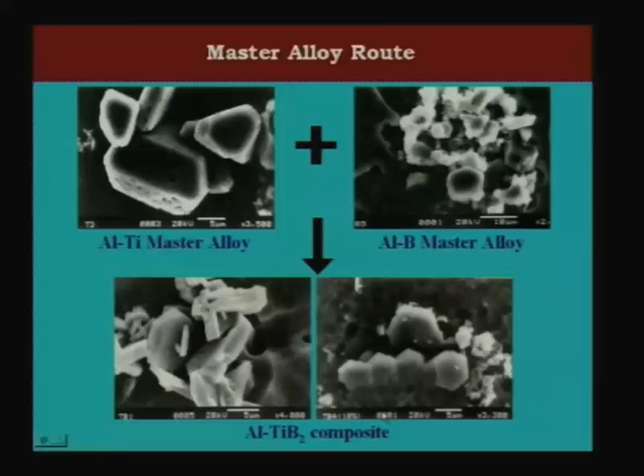AlB2 particles, put them together and react them to get TiB2 particles. These TiB2 particles are hexagonal in structure and give you very high strengths, and that is what is called the master alloy route.

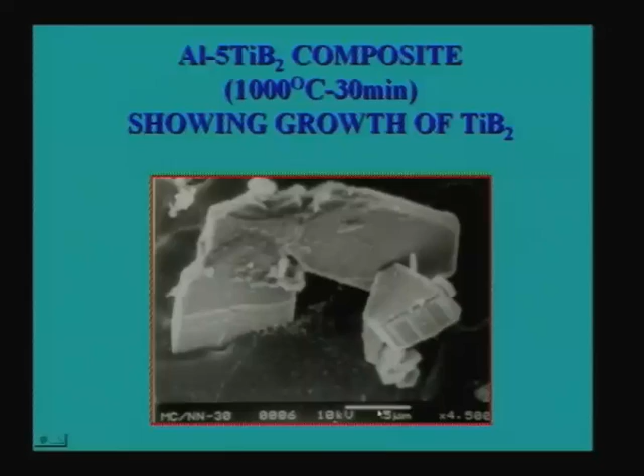We have also talked about the growth morphology. Basically the growth occurs on the basal planes of TiB2, because TiB2 has a hexagonal structure and the basal plane is the most close-packed plane, so growth occurs in the C direction on the basal plane. Once a nucleus has formed, growth occurs in the C direction.

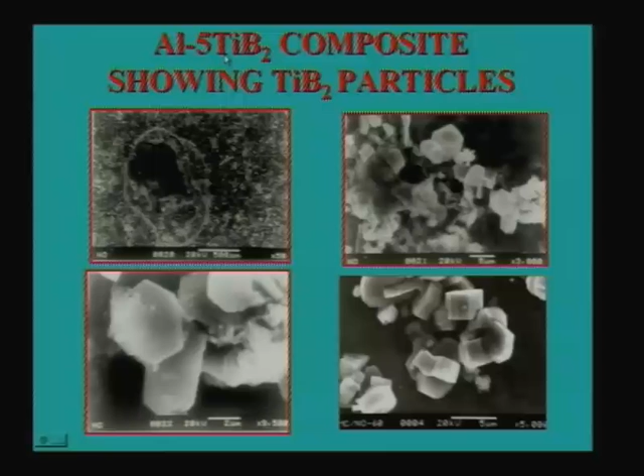One can also make these composites at different volume fractions. This is for 5% TiB2; we will also come to 10% TiB2 a little later. This is the extraction of particles we have talked about.

That means one can dissolve all the aluminum matrix and show the morphology of the TiB2 particles in three dimensions, once the whole aluminum has been dissolved. You get these powder particles of TiB2 which you can see under the SEM, and one can also subject them to X-ray diffraction to confirm it is only TiB2 and nothing else.

So if you take these powder particles obtained from extraction of TiB2 from the aluminum TiB2 composite, where you dissolve all the aluminum and collect the residue, and subject that residue to XRD, you see peaks which are completely TiB2 peaks.

This confirms that no Al3Ti is forming, because that is one of the problems I told you about in the last class - that whenever you are making a TiB2 composite with an aluminum matrix, there is always a chance for Al3Ti also to form. So one has to really control it, and that's one way we control it.

One of the basic ways of controlling is through composition. As you know, for TiB2, if you look at it, what is the ratio of titanium to boron in TiB2? How do you know that?

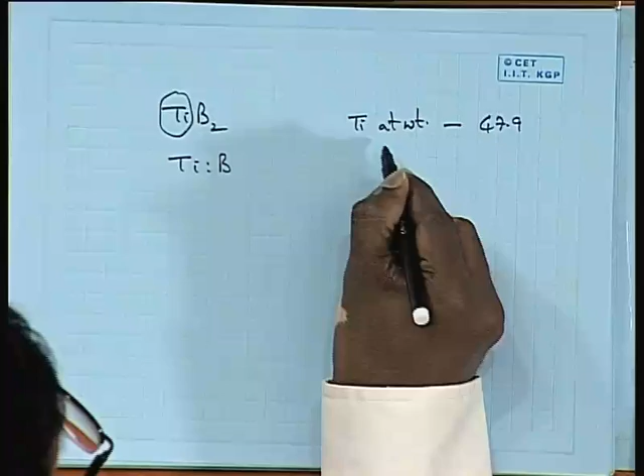Weight ratio, obviously - when I say titanium to boron weight ratio, from the stoichiometry one can find out. What is the atomic weight of titanium? Atomic weight of titanium is 47.9, close to 48, and boron atomic weight is 10.8.

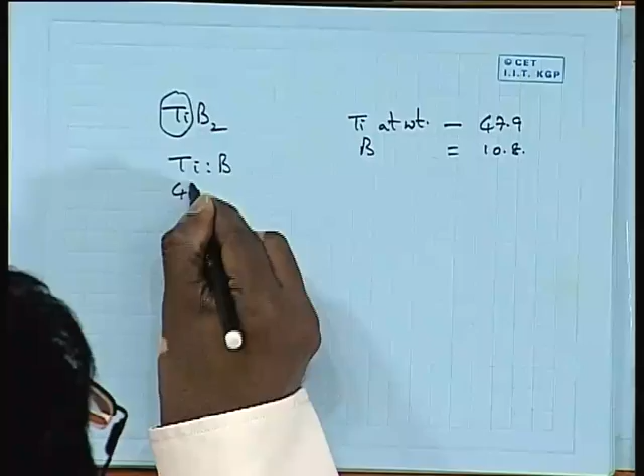So you have two atoms of boron, so the weight ratio becomes 47.9 is to 21.6, that is 10.8 multiplied by 2. This becomes equivalent to about 2.2 is to 1.

That means when you take titanium and boron, when making the aluminum titanium master alloy and aluminum boron master alloy separately, you have to make sure the titanium content in the aluminum titanium master alloy is 2.2 times the boron content of the aluminum boron master alloy. That has to be controlled.

In addition, when making these master alloys, there is always some loss of boron - particularly because of BF3 formation, which is a gas at a temperature of around 750. So one has to consider the losses of boron and maintain this ratio, using processing conditions like reaction temperature and reaction time carefully.

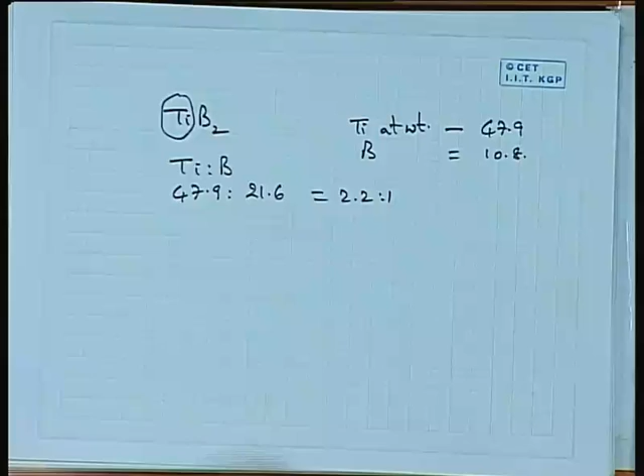If the ratio is not maintained, for example if you have excess titanium, what will happen? Al3Ti will form - the excess titanium left out will react with aluminum and form Al3Ti.

And if you have excess boron, that excess will form AlB2. Our objective is not to have these two phases, but to have only TiB2, hence process parameter control is very crucial.

That is why these new composites, the in-situ composites, are still in their infancy - people are still doing a lot of research and they have not yet become commercialized.

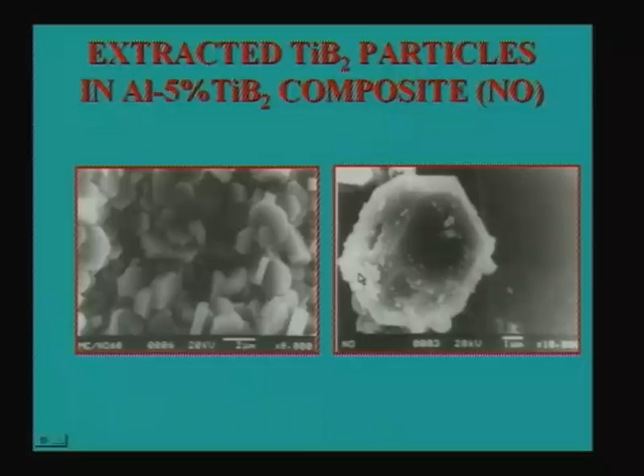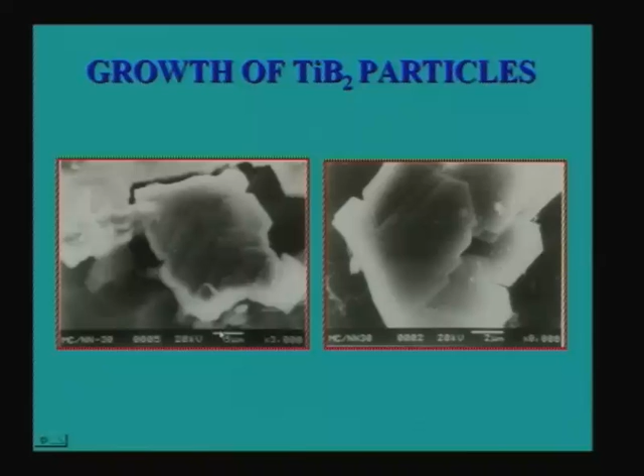This is for 10% TiB2, similar analysis can be done. If you carefully observe the composition of titanium here and boron here, it is 6.9 and 3.1, and the ratio is 2.2 is to 1, which is what we maintain.

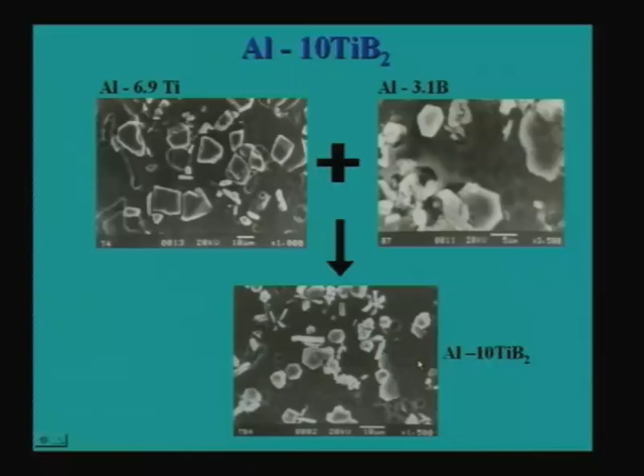If you do not maintain this ratio, you will not end up with only TiB2, because ultimately in the composite you want only TiB2 particles. So one has to control this composition, and this is the morphology.

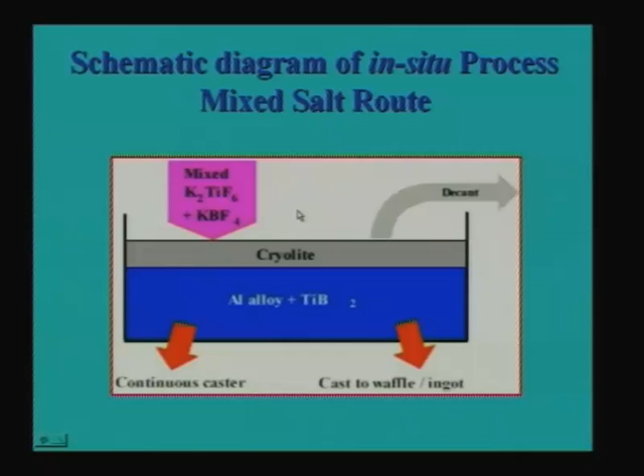The other route is what we just started in the last class, called the mixed salt route. Instead of making separate master alloys, one can directly add both salts into the liquid aluminum at about 750 or 800 degrees centigrade and make these composites.

Looking at the reactions involved: if you take liquid aluminum and add KBF4 plus K2TiF6 together, boron and titanium come out of these salts and go into the liquid aluminum, making a liquid aluminum solution with titanium and boron.

So this is a liquid solution, and from this liquid, in addition KAlF4 comes out, which is the dross. From this titanium and boron containing liquid aluminum, you can get various compounds - AlB2, AlB12, TiAl3 and TiB2. Now the question is, if you want only TiB2 to form, one has to control various process parameters.

One point is the Ti:B ratio, another the temperature, which is crucial, and the time of reaction, which is also crucial. All these have to be controlled so that ultimately you end up with an aluminum TiB2 composite. This is similar to making a grain refiner, aluminum titanium boron grain refiners, which we talked about earlier.

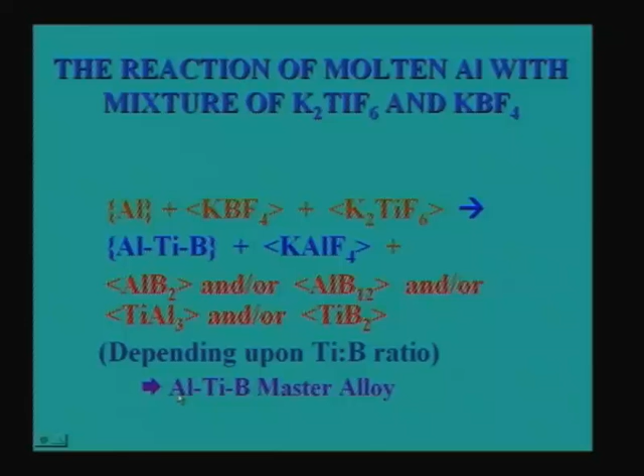So the control that you need to exercise is much more than what you do in case of the aluminum titanium boron master alloy, which is made for grain refinement of aluminum alloys. If you do that, you end up with TiB2 particles definitely, but one has to control various process parameters.

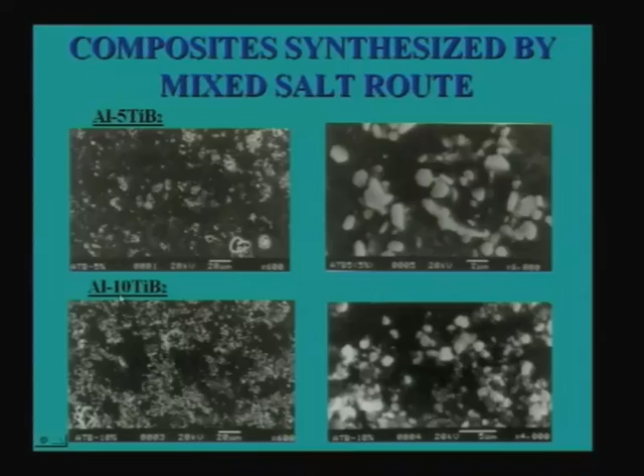This is for 5% TiB2, this is for 10% TiB2. As you can see, in 10% TiB2 you will have more volume fraction of TiB2, which is what is expected. Whatever percentage we are talking here is weight percent, and one has to convert it into volume percent. How do we convert weight percent to volume percent?

Whenever we talk of a composite, we usually refer to only volume fraction. Whenever I say aluminum 20% silicon carbide composite, we are not talking about weight percent of silicon carbide, we are talking of volume percent of silicon carbide. So how do we convert it? By considering the densities of the two phases. Once we know the density of the two phases, one can calculate the volume fraction.

One can also see that if you add a surface active kind of salt, called cryolite, it has a tendency to uniformly promote TiB2 formation.

Basically the problem with TiB2 formation is that K2TiF6, when added together with KBF4, reacts with aluminum much faster than KBF4, because it has a much stronger exothermic nature of reaction. So the reaction is much more vigorous, and K2TiF6 also has a tendency to form what is called emulsification.

That means K2TiF6 in an aluminum matrix, if added, gets uniformly distributed and emulsifies the liquid, making it into droplets, because of which there is a vigorous reaction. This leads to the formation of more Al3Ti than TiB2, because aluminum reacts with K2TiF6 first, before the KBF4 starts reacting.

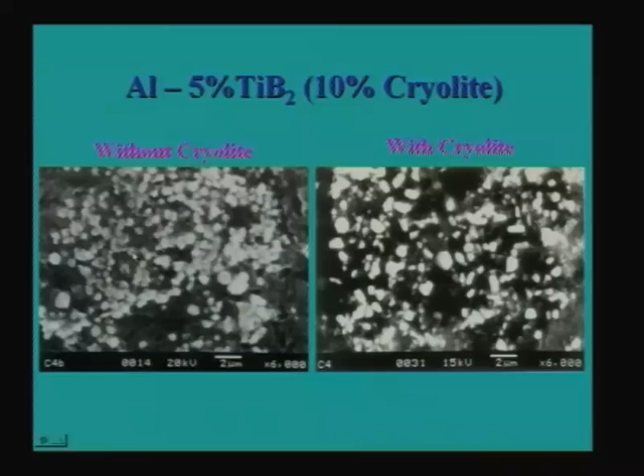People have done that in a number of cases. Without cryolite addition, you get agglomeration of particles which contain both Al3Ti and TiB2, and if you add cryolite, you get more or less uniform distribution of only TiB2. These particles which you form still have some Al3Ti. If you do EDAX on individual particles, you will also find some Al3Ti in them.

Similarly, one can also study 10% TiB2. In case of 10% TiB2 also, one can get a similar nature.

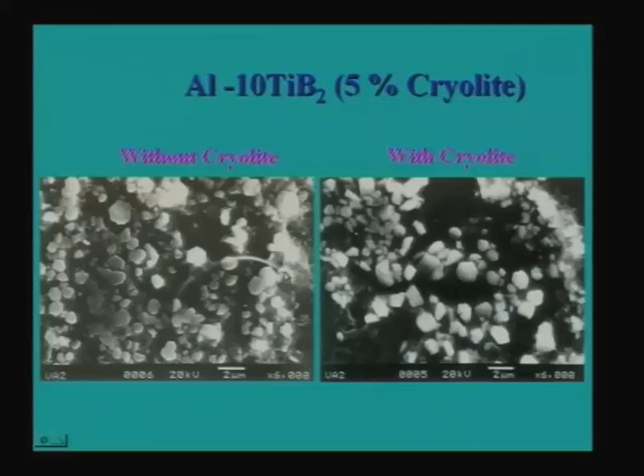One can also study the effect of temperature. At higher temperature there is a problem: as I told you before, KBF4 has a tendency to dissociate and form BF3 gas, and this tendency to dissociate increases with increase in temperature.

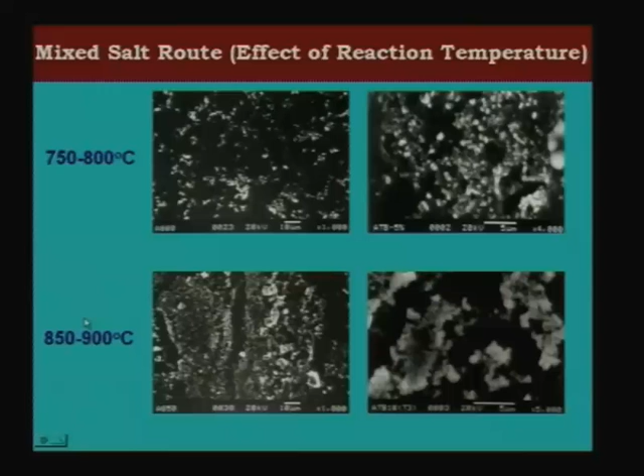So if you go to higher temperature, 850 to 900 degrees centigrade, you end up with fewer particles, and most of those will be Al3Ti particles, because the boron has already vanished, so you don't have boron left to react with the liquid metal to give you TiB2 particles. One has to control the temperature and keep it down so that you have formation of TiB2 particles alone.

One can also study the effect of reaction time, because there is a minimum time required for the reaction to complete. If you do not allow sufficient time, the reaction is incomplete, so you will have unreacted salts left in the liquid metal, which go into the dross, and you lose a lot of titanium and boron. As a result, there is a minimum amount of time, and we have seen that almost 45 to 60 minutes of reaction time is required for the formation of TiB2 particles.

One can also study how the XRD patterns change as you keep increasing the reaction time - with increasing reaction time the TiB2 peaks start becoming bigger and bigger, which indicates the volume fraction of TiB2 is increasing.

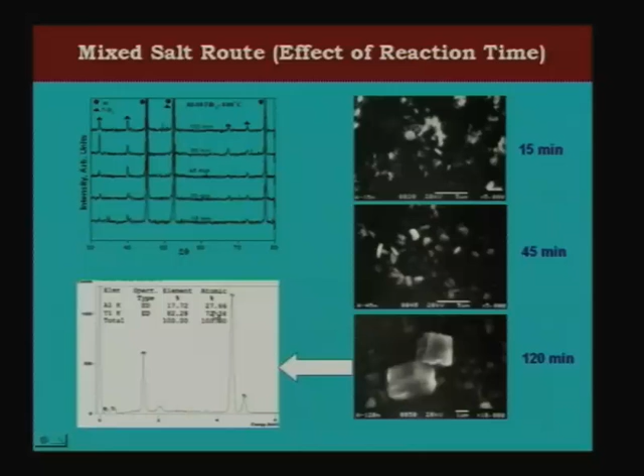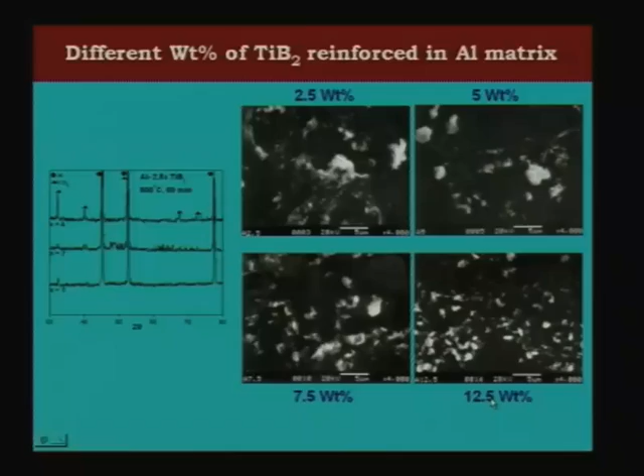This is the EDAX showing the volume fraction on one of the Al3Ti particles, and one can also vary the percentage of TiB2 - 2.5%, 5%, 7.5% and 12.5% are shown here - just to give an idea that one can vary the volume fraction of these particles so that one can have improvements in strength, as we know that with higher reinforcement amount we get better strength.

But the problem with this kind of method - I should also tell you the difficulties - is that one cannot have very large volume fractions. In case of ex-situ composites, one can even imagine 30%, 40% volume fractions when externally adding silicon carbide particles. But here, you are adding a salt which reacts with aluminum and gives you TiB2 particles. So because of that, if you want more volume fraction, you have to add more amount of salt.

For example, if you want 10% of TiB2, that means if you take about 1 kg of liquid metal, you want 10% of TiB2 in that - about 100 grams of TiB2. If you want 100 grams of TiB2 in 1 kg of liquid metal, you need to add almost 1 kg of salt, because with K2TiF6, if you want to make 10% of TiB2, you need to add 6.9% of titanium - that is what we have seen before. 6.9% of titanium plus 3.1% of boron will give you 10% of TiB2.

So if you want 6.9% of titanium, that means 69 grams of titanium. So you can calculate how much K2TiF6 has to be added to get 69 grams of titanium into it, because potassium and fluorine also have to be considered. The molecular weight of K2TiF6 is going to decide how much weight of K2TiF6 gives you how much titanium.

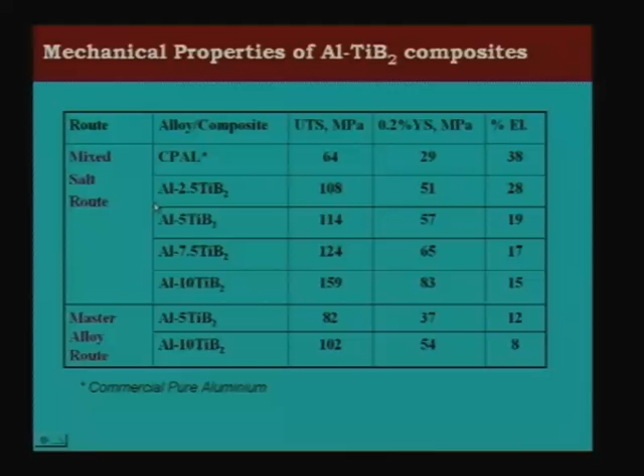So how to control gas absorption by this aluminum? High temperatures lead to that, and because of which the elongation comes down and the strength also comes down to some extent. That's why the mixed salt route is commercially also more viable, because you are not really going through a 3-step process of making 2 master alloys first and then remelting them together, and at the same time one can achieve much better strengthening.

And this is about aluminum copper. As I told you, usually people prefer to add TiB2 or any reinforcement for that matter to an aluminum alloy rather than pure aluminum. Particularly aluminum copper has an advantage because it is an age hardening system. So one can also have what is called precipitation hardening, formation of the theta double prime or theta prime kind of precipitates, so that you can have additional strengthening coming because of the precipitates in addition to the reinforcements that you have already added.

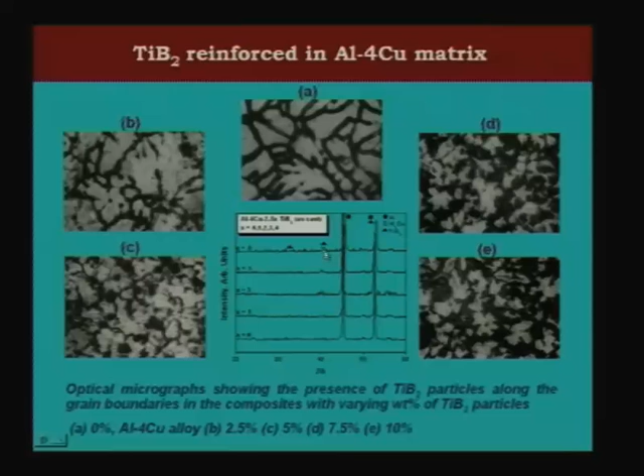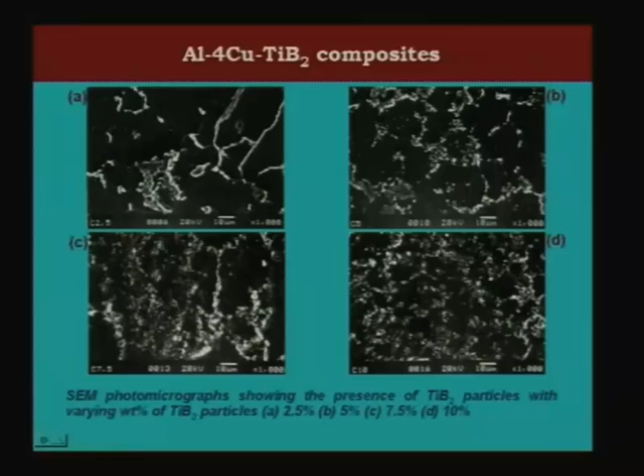So if you take this kind of aluminum copper alloy and add different amounts of reinforcement - 2.5%, 5%, 7.5% and 10% - you can see different volume fractions of particles have been added to an aluminum copper base alloy. With increasing percentage of TiB2, you can see the peaks of TiB2 become bigger and bigger, and this is the SEM photographs showing higher volume fraction of these TiB2 particles. The magnification is very low, so you can see very fine particles of TiB2 uniformly distributed in the matrix.

If you look at the age hardening phenomena of this particular alloy, you can take the base alloy, for example, which is nothing but this bottom curve with the open circles. That shows you that the strengthening you can achieve is lower than what you can achieve with all these particles. So when you add different volume fractions or weight fractions of TiB2, you can have much better strengthening because of the presence of TiB2 particles.

Another important thing you can see is that the peak hardness is achieved at a lower time, meaning the aging process is hastened or becomes faster. Why? Because the presence of these TiB2 particles act as nucleating sites for the theta double prime or theta prime or the GP zones to form. For example, with 10% TiB2, the peak hardness is reached within almost about 6 hours, whereas without any TiB2, the peak hardness takes almost about 12 hours. In fact it has a very shallow peak, and the highest peak is reached after about 40 hours.

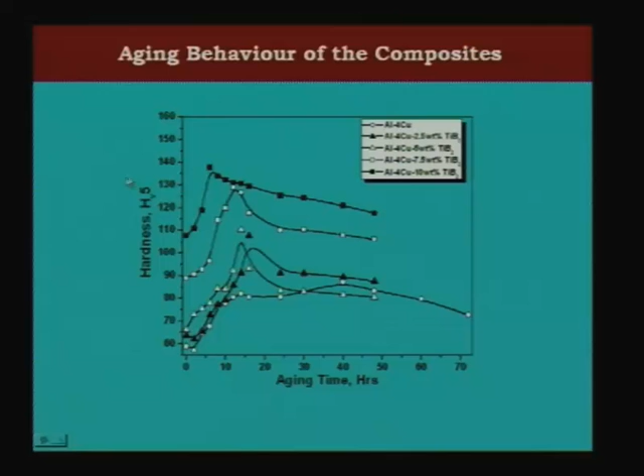So you can see, compared with 40 hours, within 6 hours your aging time is drastically reduced. So you have a double advantage here: not only can you have higher strengthening, but also much faster aging treatment. You can see almost from about 80 Vickers hardness to almost 140, so almost double the strengthening that we can achieve in this case.

And that is as far as hardness is concerned. Here we have the tensile properties. You can see aluminum copper as cast alloy has almost 117 UTS with about 11% elongation, and if you do peak aging, you get about 276 UTS with about 21% elongation.

And then if you take about 10% TiB2, with increasing percentage of TiB2, the strengthening increases. With 10% TiB2, you get about 290 even without aging itself, in the as-cast condition. If you age it, you get about 380 MPa, which is much higher. Compare this with no reinforcement, where the highest achievable even in peak aging condition is only about 276 — almost 100 MPa increase is possible with TiB2, and the ductility still remains almost 19%. Yes, after aging, percentage elongation increases.

This is only because of the fine TiB2, because this does not happen if you do it ex-situ. If you take the same aluminum copper and add silicon carbide, the strength may increase, but the ductility will never increase — in fact the ductility will fall. This is what happens with TiB2 particles, because they are also compatible with the matrix, so you have good compatibility at the interface, and there are no reaction products at the interface. This is also happening for the simple aluminum copper.

Yeah, aluminum copper also — this is as cast also, you can see about almost 4% or so. But if you carefully observe, the increase is much higher at smaller volume fraction. If you go to higher volume fraction, it decreases, and at probably 20% volume fraction it further decreases, because whatever the compatibility, TiB2 is anyway a brittle intermetallic compound — a hard compound. So if you keep increasing the volume fraction of the hard phase, you cannot expect the elongation to keep increasing.

So if you carefully observe, the elongation keeps decreasing here. At small volume fraction you have much higher elongation, but as you keep increasing the volume fraction, the elongation decreases, and 10% gives you only about 15%. But what is important is that the elongation is good enough to give you a dimpled fracture, which is important for any structural component. Any material you want to use for structural applications has to have a certain amount of ductility — if it does not, you cannot use it for any structural application.

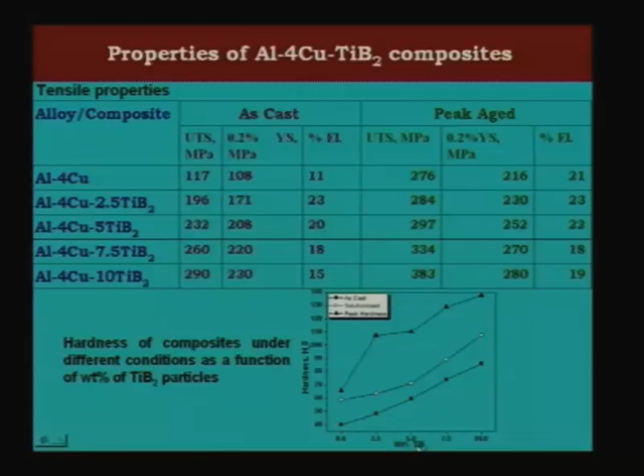This is very important. You can see here the hardness plotted both in the as-cast condition and in the solutionized condition and the peak-aged condition. It increases with increasing volume fraction. This is expected, as we know higher amounts of TiB2 will give higher strengthening. And this is as far as the fractographs are concerned — you can see that even with 10% you have some dimpled fracture. This is what I wanted to say.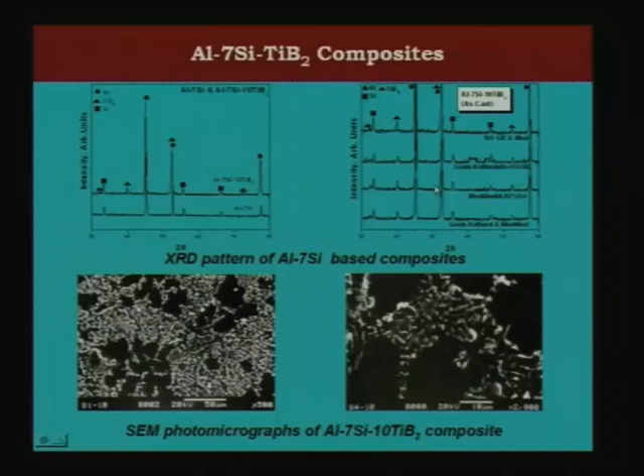From the XRD pattern one can see that one can do grain refinement of the aluminum 7 silicon alloy and do modification so that one can have an improvement in the properties. We will try to see what kind of improvements.

The improvements are not really as dramatic as in case of aluminum copper, because aluminum copper is an age hardening system, whereas aluminum silicon is not. So one cannot achieve really very high strengthening here, but still, if you take aluminum 7 silicon alloy without any TiB2 you get about 110 UTS, with TiB2 you get about 206, almost double the strength. And if you look at the elongation, 10% and 13%, so you do not lose the elongation, that is very important to note.

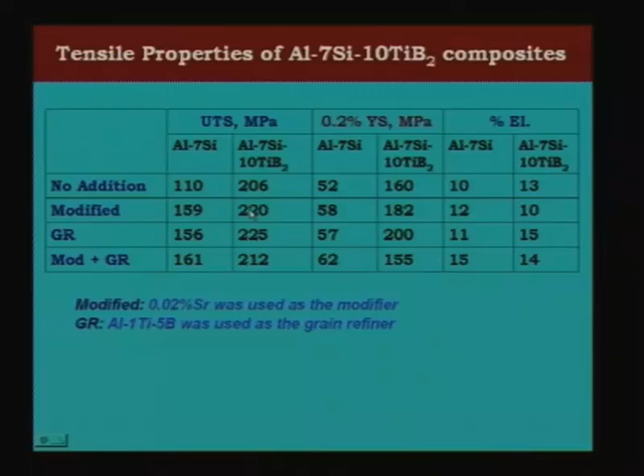Similarly, when you modify it you get an improvement in the properties, and grain refinement also gives improvement, and a combination of both also gives an improvement, but not very high. Similarly, in presence of TiB2 one can have an improvement in properties, but it is not as dramatic as in the case of copper. So this is as far as aluminum TiB2 is concerned.

Let us try to look at aluminum TiC composites. This is another class of new generation composites, where again the situation is similar, you need titanium and carbon to form TiC. What is the ratio here?

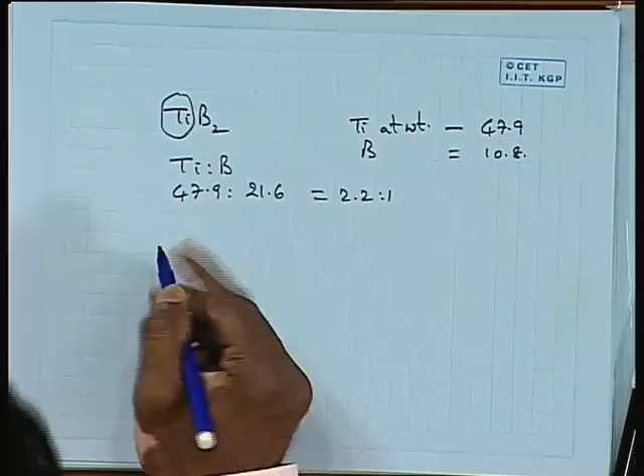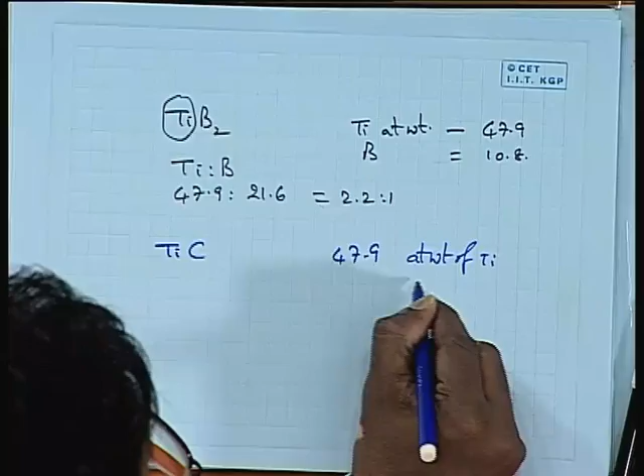If you again look at TiC, titanium atomic weight we have already seen is 47.9. What is the atomic weight of carbon? Atomic weight of carbon is 12.

So the ratio of Ti to C that we need here is of the order of around 4:1. So if one can have a ratio of about 4:1, one can control to give you only TiC particles. The interesting feature of TiC is it is a cubic phase.

It is like in case of aluminum nanocomposites, earlier we have seen that we wanted to convert Al3Ti, which is a body centered tetragonal structure, DO22 structure, to a cubic phase by either ball milling or by adding certain alloying elements which will stabilize the cubic phase, so that you have an aluminum matrix which is face centered cubic, and inside that you have other cubic particles, giving you a composite which we called a nanocomposite because the phases are in the nano stage. You have cubic nanoparticles in a cubic matrix, which gives much better strengthening and also sufficient deformability, because both structures are cubic.

We know that cubic structures are more deformable. Similarly, here you have an aluminum matrix which is cubic, and TiC which is also a cubic structure. So that is why we expect the strengthening in TiC composite to be very good.

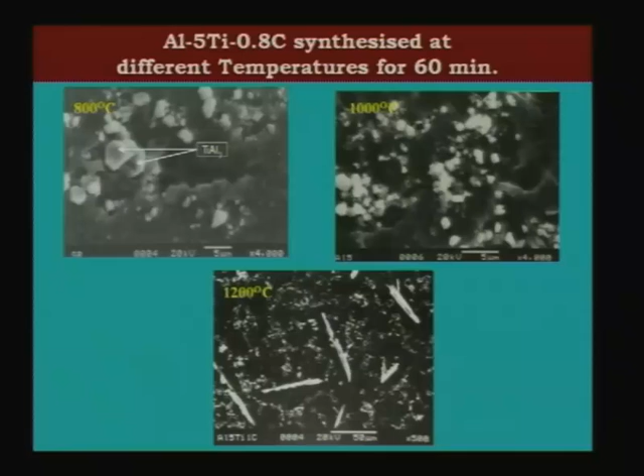This excess titanium will react with aluminum to give you TiAl3. The only difference with temperature is that at low temperature TiAl3 forms as blocky, more or less equiaxed particles. At higher temperature TiAl3 grows as needles or plates, because it has a tendency to grow in one particular direction, the 001 type direction, giving this flake, plate-like, or needle-like morphology. What's important is that you always end up with some TiC particles plus TiAl3. This clearly shows why we should control the composition.

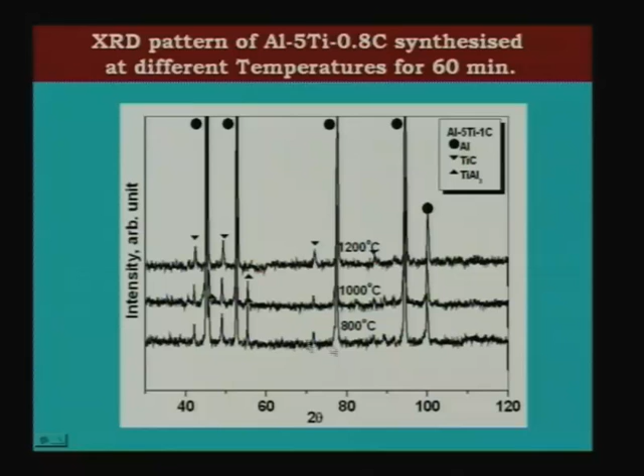Then go to the next one, we'll come to that a little later. Here at different temperatures, the formation of both TiAl3 and TiC can be seen, and this is with 0.8% carbon. In 1.2% carbon you can see that only TiC forms.

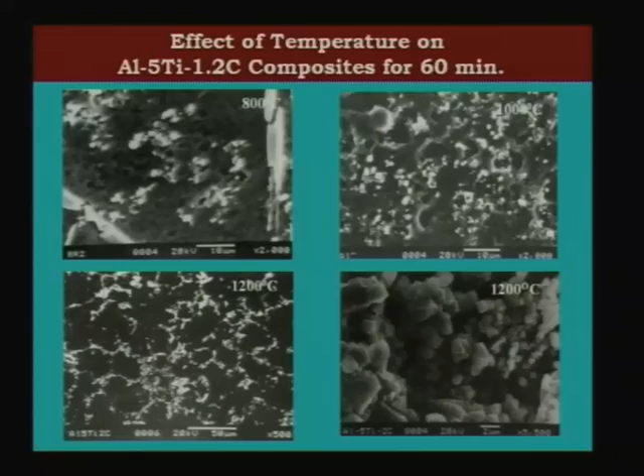How do you know these are only TiC? One can do X-ray of them, extract these particles and study X-ray of them, or do EDAX on individual particles to find out whether they are TiC or TiAl3. If they are TiAl3 particles, you'll easily see in the EDAX that there's no carbon peak, so one can easily say these are not TiC particles.

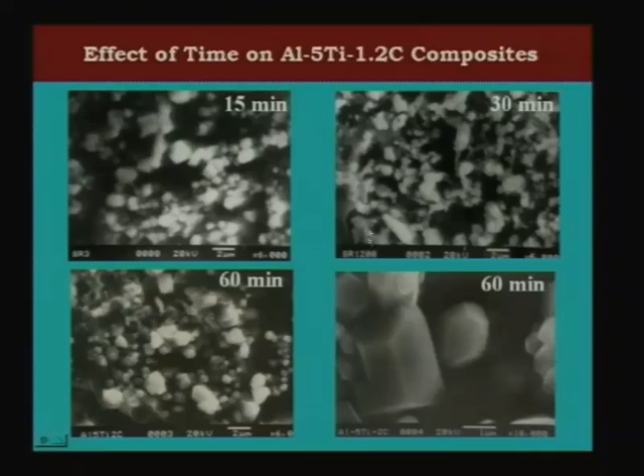So if you do that, this is as a function of reaction time. Again here you need a minimum of about 60 minutes for the reaction to give a more or less uniform distribution of particles, and these particles are of faceted nature. This faceted nature is very useful when you want to use them as grain refiners also, because TiC is cubic in nature, so TiC can act not only as an aluminum-TiC composite but also as a grain refiner.

One can use the aluminum-TiC as a grain refiner for aluminum alloys. We will come to it a little later.

If you look at these aluminum-TiC composites, one with 0.8% carbon and another with 1.2% carbon, you can see the presence of TiC particles very clearly in the 1.2%. If you dissolve the aluminum matrix and look at the extracted particles carefully, the 0.8% carbon extracted particles show both TiC peaks and TiAl3 peaks. Here you cannot see those TiAl3 peaks because the volume fraction of TiAl3 is very small.

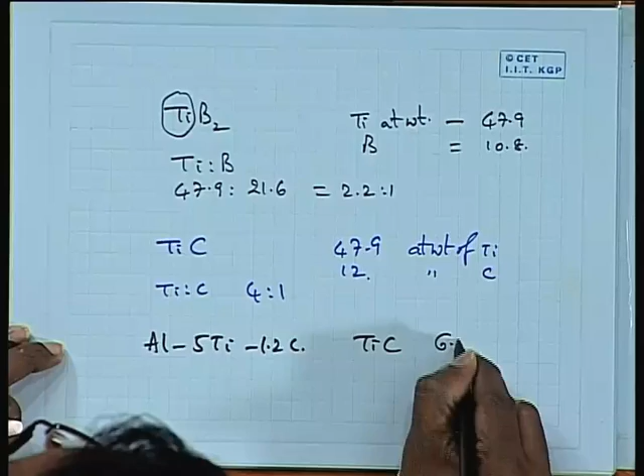So if you take the whole composite and subject it to XRD, you can see how much TiC there is. You're taking a composite of aluminum, 5% titanium and 1.2% carbon. So how much is the TiC? TiC is 6.2%, 5 plus 1.2, that's the TiC. So weight percent of TiC is 6.2%, and we know X-ray has a limitation: whenever the volume fraction of a phase is very low, you cannot see those peaks.

So if there's some TiAl3 also formed in that 0.8% carbon composition, the TiAl3 volume fraction will be so small, because only after titanium reacts with carbon does the leftover titanium react with aluminum to give TiAl3 — TiC is much more stable than TiAl3 thermodynamically. As a result, the first preference of titanium is to react with carbon.

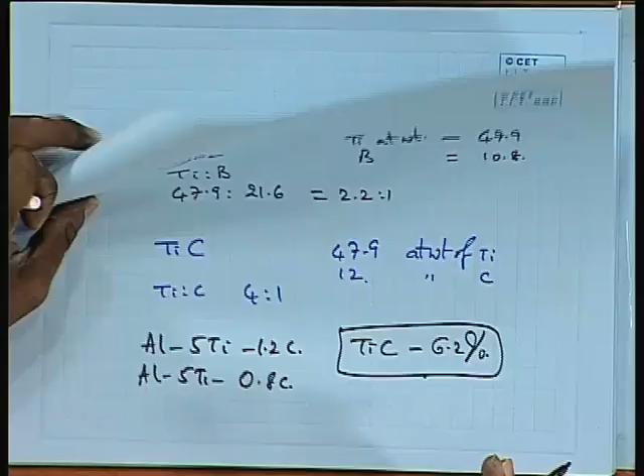So as a result, you see that only excess carbon matters, for example in this composition of aluminum-5-titanium, one can easily calculate the volume fraction of TiAl3, TiB, and TiC. For example, if you take 4:1 as the ratio of titanium to carbon, for 0.8% carbon, how much titanium do you need?

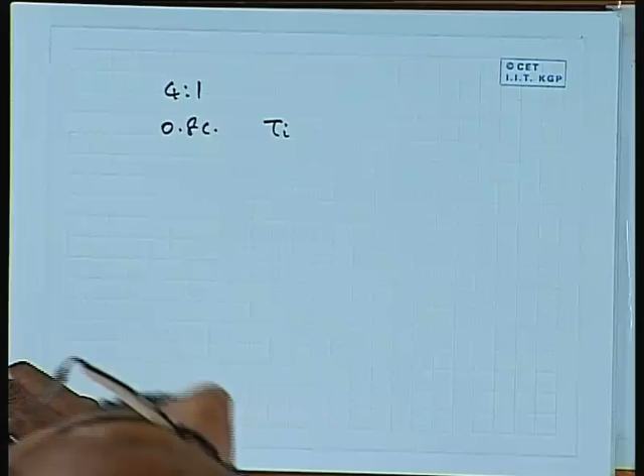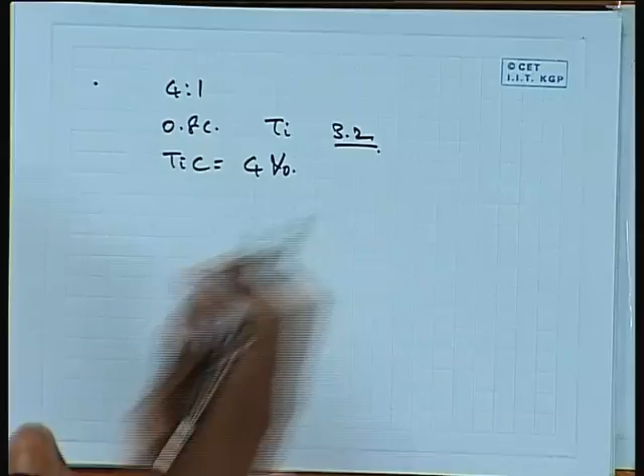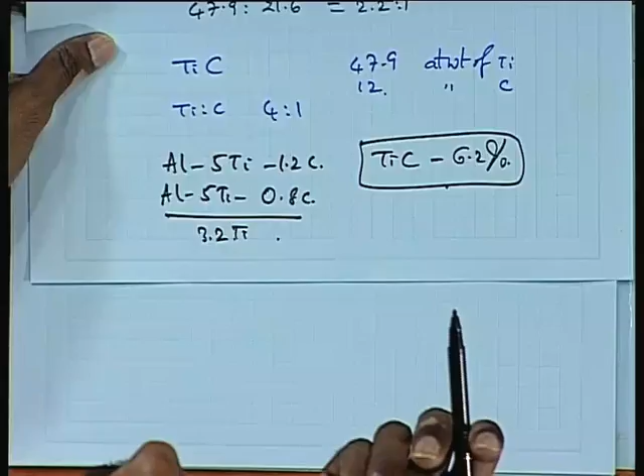3.2, fine. So what will be the volume weight fraction of TiC? 4% of TiC will form. Now, if I take 5% titanium alloy, this is the alloy I am talking about. In 5% titanium, 3.2 of titanium has already gone and reacted with carbon. So what is left out? 1.8%. So that 1.8% titanium will react with aluminum to give you TiAl3.

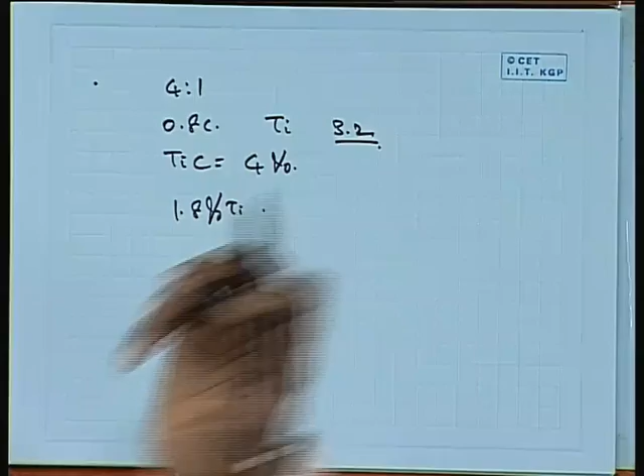As a result, the volume fraction of TiAl3 is going to be about 2% or 3%, because it is Al3Ti, maybe 3% or 4% again. One has to calculate that.

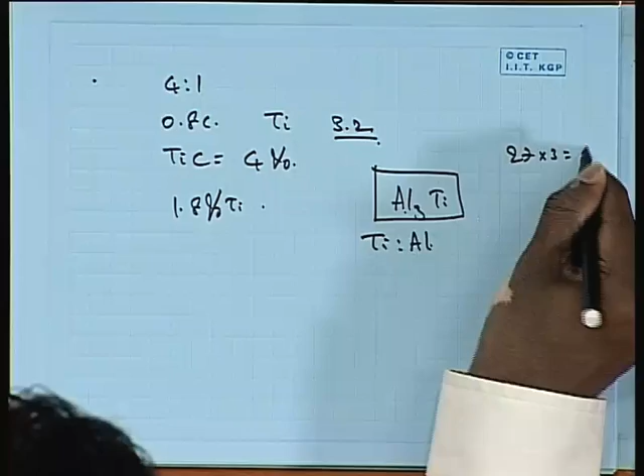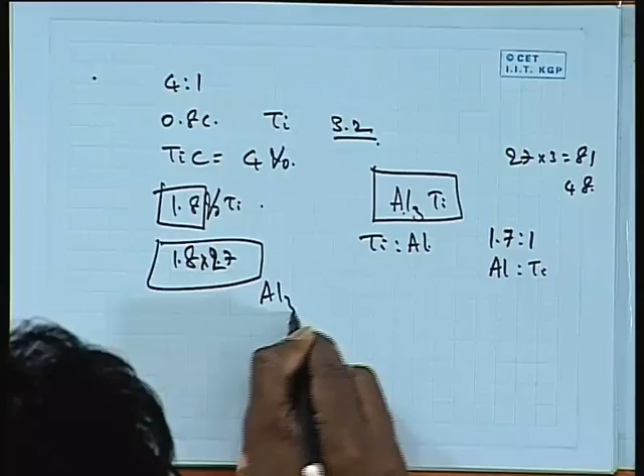Similarly, if you look at the ratio of titanium to aluminum in TiAl3, one can find out what is the ratio, because this is 27, 27 into 3 is 81, and titanium is 48. So if you take the ratio of aluminum versus titanium, you get something like 1.7 is to 1, aluminum is to titanium. So that means 1.8% multiplied by 1.7 will give 2.7, one should add, because 1 of titanium, 1.7 of aluminum, so 2.7 is the total.

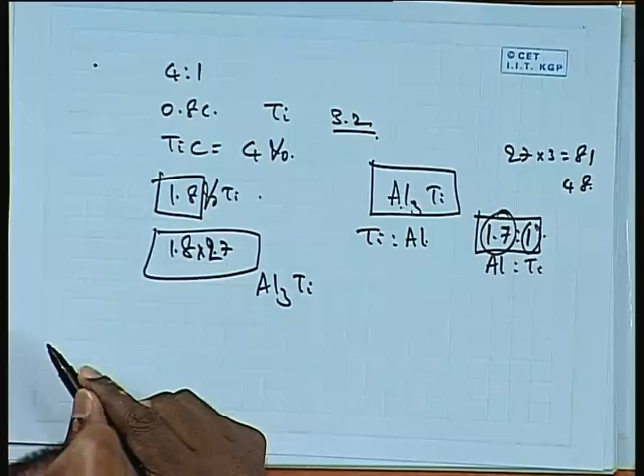So if you take titanium as 1.8 and multiply with 2.7, you get something like about 4% or 5% or so, okay, double of this 5%.

So that 5% volume fraction is small to see in an XRD if you take the composite, but once you have extracted the particles out of the composite, now aluminum has gone. So whatever particles have been extracted, in those particles you can easily see whether there is TiAl3 or TiC.

If it is only TiC, you will see this kind of situation, all the peaks will be only TiC peaks. From that you can clearly say there is no TiAl3. And if you go to 0.8 you can see this, and from the ratio of these peaks one can find out how much TiC is there and how much TiAl3 is there.

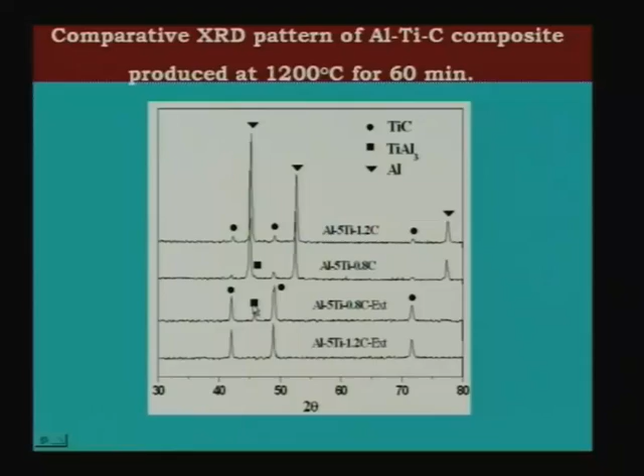So the weight fraction of TiC and TiAl3 in the composite can be found out from this kind of extraction experiment. Whenever you are working on composites, this is the best way to find out the volume fraction, because otherwise, unless you do a large number of metallography experiments, it is very difficult to find out the volume fraction. Mostly in metallography, if you use quantitative metallography, you will only get the area fraction, not the volume fraction.

We usually assume the area fraction to be equivalent to volume fraction and do it that way, but that is not a correct assumption. So it is not a correct way of doing it. But if you can dissolve the matrix very easily, which is possible in aluminum matrix alloy, then you can get the weight fraction, and once you know the densities, one can calculate the volume fraction.

That means you take a known weight of aluminum titanium carbide composite, and dissolve that known weight into, let us say, a sodium hydroxide solution, and take out all the particles that come out and weigh those particles. From that one can get an idea of the weight fraction of those particles.

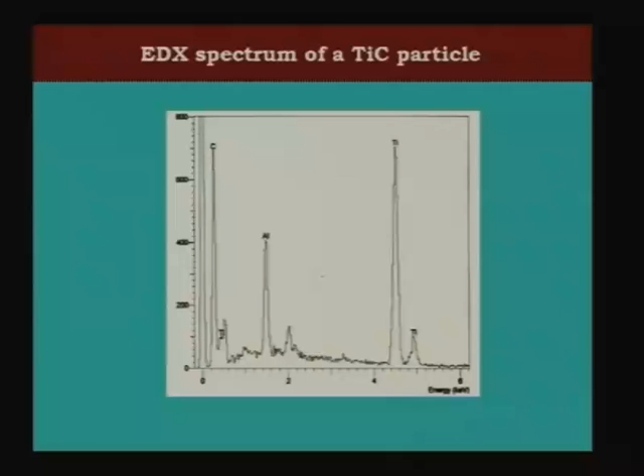And look at those particles in the EDAX also, to confirm that there are only TiC particles. Here I am not showing you the mechanical properties, which are similar to that of TiB2, but looking at the grain refinement behavior of this alloy which is added to pure aluminum, and compared with different types of grain refiners.

One is an aluminum 5 titanium grain refiner. Aluminum 5 titanium grain refiner has only TiAl3 particles, so here you have only TiAl3 particles acting as nucleating sites. You can see the grain refinement is not very good. This is without any grain refinement, you get a columnar grain structure which is typical of any casting, and if you add the grain refiner, you get some grain refinement but not very good.

You add aluminum 5 TiB2 composite where only TiB2 is there, again here also you get grain refinement but not as good as you get with TiC alone. So here you have only TiC.

Here, if you take aluminum 5 titanium 1 boron kind of master alloy, which is a conventional grain refiner, it will have both TiAl3 and TiB2. So if you compare all this, it gives you an idea of the grain refining potency or efficiency of individual particles. How does TiAl3 act? For example, whenever we are talking of heterogeneous nucleation, what is important is the contact angle.

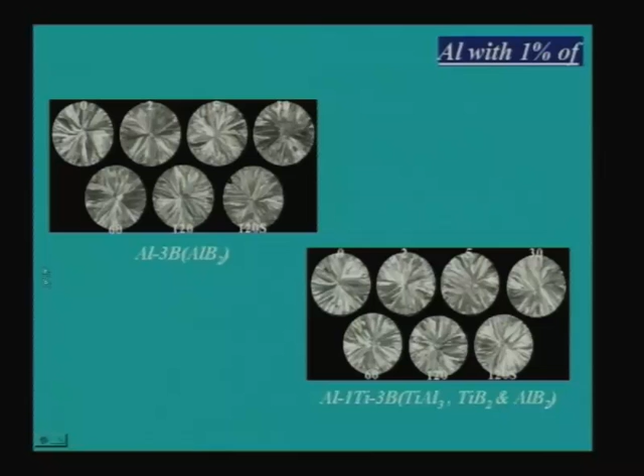This is one important thing with aluminum: with aluminum boron, where you have AlB2, you do not get any grain refinement at all. You can see even after adding AlB2, you get the same columnar grain structure.

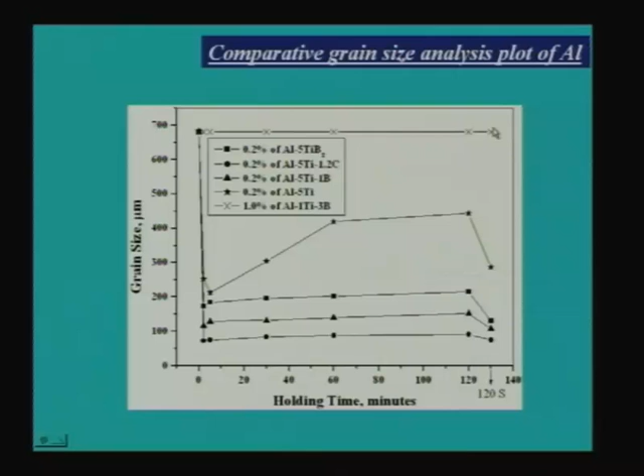This is to give you an idea of the grain sizes you can get. You can see that with TiC you get the lowest grain size, and with AlB2, the boron alloy, you get the highest grain size. So one can talk about the grain size analysis, and this is with silicon, aluminum 7 silicon.

Usually most grain refiners, when added to aluminum, give good grain refinement, but when added to aluminum containing certain alloying elements, you do not get good grain refinement. This is what people call the poisoning effect: the alloying element present in aluminum reacts with the particles you are adding for grain refinement, the heterogeneous nucleating sites, and forms some kind of complex particles on the surface of these particles.

For example, if I take a TiAl3 particle and add it to an aluminum silicon alloy, the silicon will react with Al3Ti and form titanium silicide, because titanium and silicon have a stronger affinity. Because of that, the silicon reacts with TiAl3 and forms a titanium silicide coating on it, and this particle, now coated with titanium silicide, cannot act as a nucleating site because its interfacial energies and contact angle have completely changed due to the coating.

This kind of thing is observed in a number of aluminum alloys containing either silicon or, for example, lithium. Aluminum lithium alloys are also very bad for this, as are aluminum chromium and aluminum zirconium. All these alloys are known to be poisoning alloys as far as grain refinement is concerned.

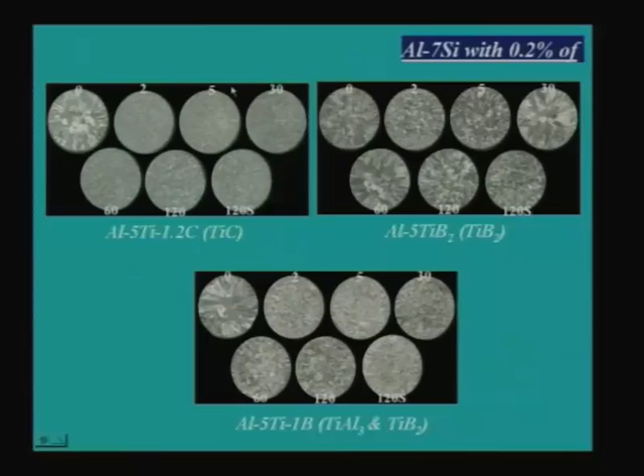So people want to study which kind of particle is very good as far as these poisoning alloys are concerned. I cannot say do not use that kind of alloy, because aluminum silicon alloy has certain important applications. We cannot say do not use aluminum silicon alloy.

The only options are: either you do not grain refine it at all, meaning you are not able to achieve the improvement in strength that grain refinement could have given you, or you add a grain refiner where the particles do not get reacted by the silicon, where the particles are stronger, where the bonding between the two elements in the particle is much stronger than with silicon. One such example is TiC.

Here again, TiC, the titanium carbide, is much more stronger than titanium silicide. The interaction parameter is much stronger, so even though if you hold it for a very long period there is some reaction of silicon with TiC, particularly at short holding times, you can see that you get very good grain refinement.

And if you add TiB2 alone, you do not get that. And if you add a conventional alloy, which is 5 titanium 1 boron containing TiAl3 and TiB2, again you do not get as good grain refinement as you get with TiC. So this is one important thing: TiC is a good grain refiner not only for pure aluminum but also for aluminum alloys which have poisoning elements.